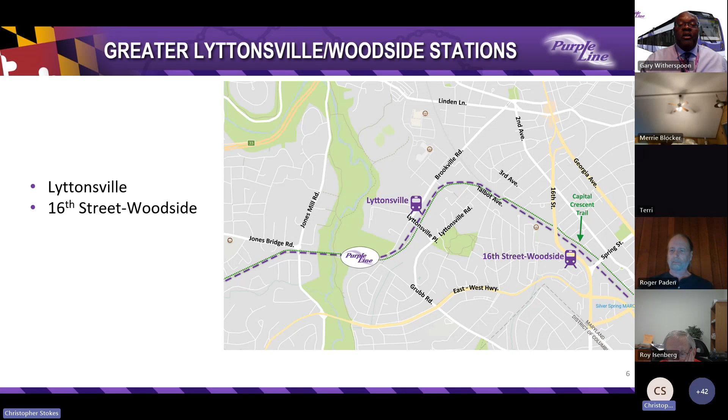Tonight, we'll cover the segment of the Purple Line that includes the following stations: Lyttonsville and 16th Street-Woodside. We are excited to share that we have created new renderings, one of which we're sharing for the first time during this meeting. Here's the 16th Street Woodside station, a side platform station that will be adjacent to 16th Street and the CSX Metro tracks near the Spring Street Bridge.

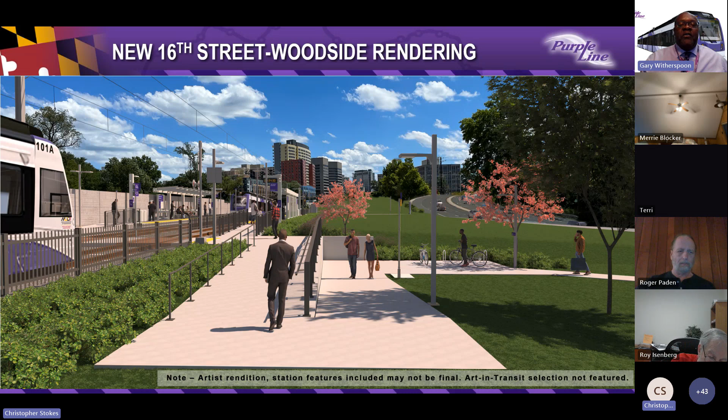The project will enhance safety around each station. We've created a series of renderings that will give the public a true depiction of how station areas will look, and all of the renderings can be found on the project website, purplelinemd.com. Now I'm going to turn the meeting over to Project Director Ray Biggs II.

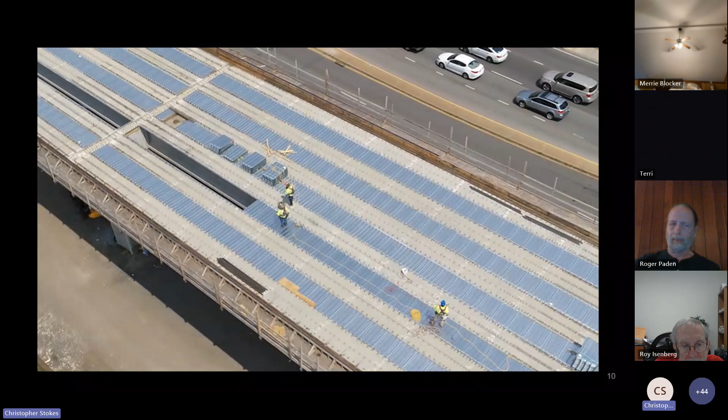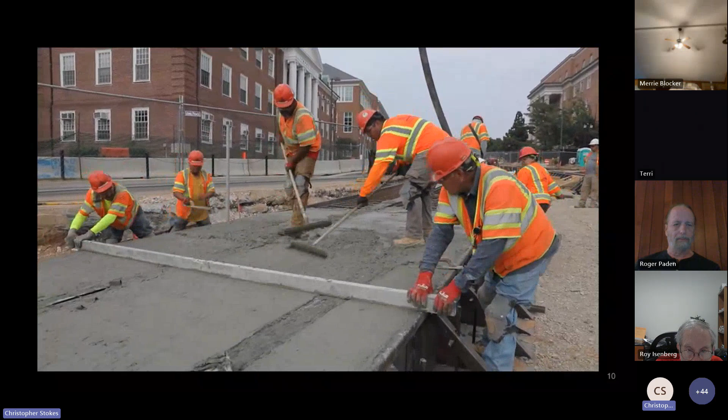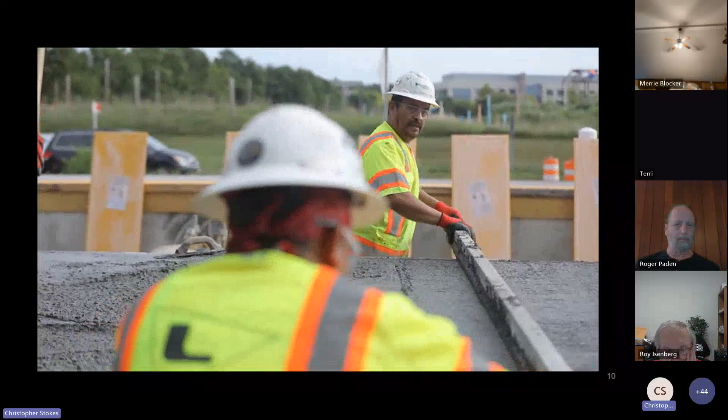I am sitting here at one of the many businesses that will benefit from the Purple Line, directly across the street from the new Riverdale Park North UMD station. This will be the first complete station. As we near the end of 2023, the nearly 1,000 workers building the Purple Line is making measurable progress along the alignment.

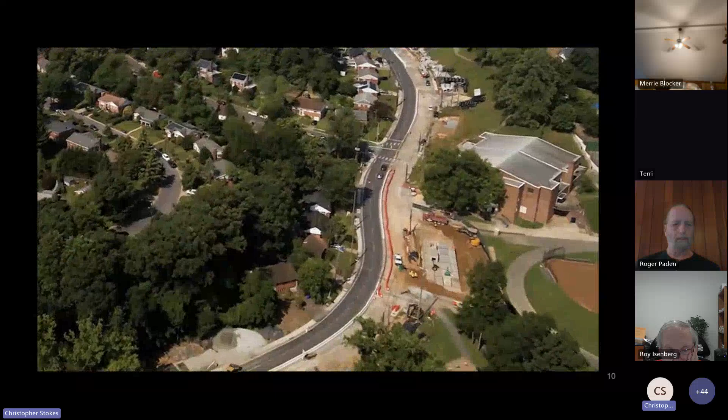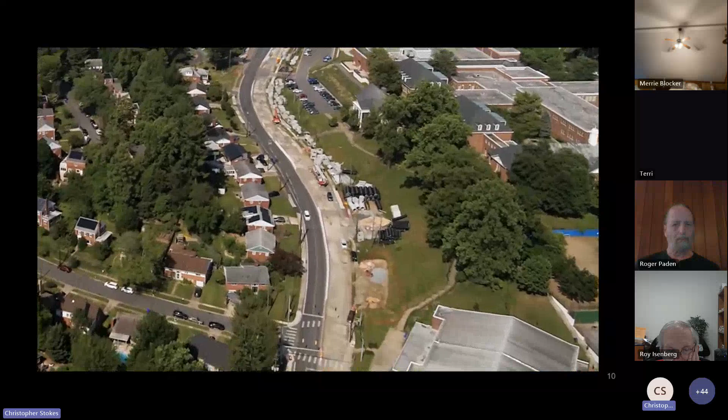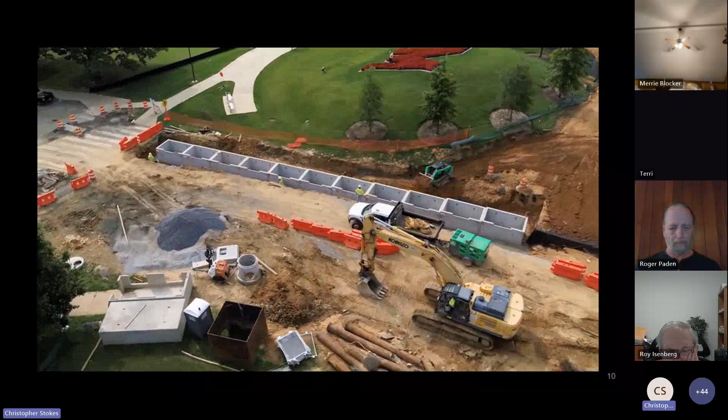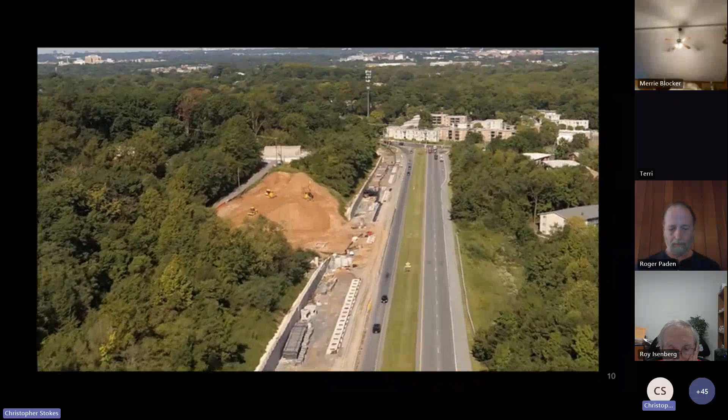Another significant improvement is the new stormwater management system. This includes miles of new pipes ranging from 12 inches to over 72 inches in diameter. More than 53% of this new pipework is now complete. Along with concrete pipes, our teams have installed over 20,000 square feet of underground sand filters, retention ponds, and planter boxes, all important parts of the new stormwater drainage system. These critical environmental upgrades may not be visible above ground, but must be completed before tracks are added.

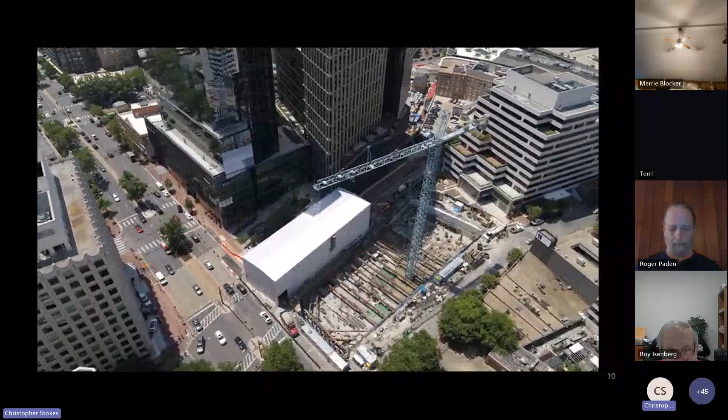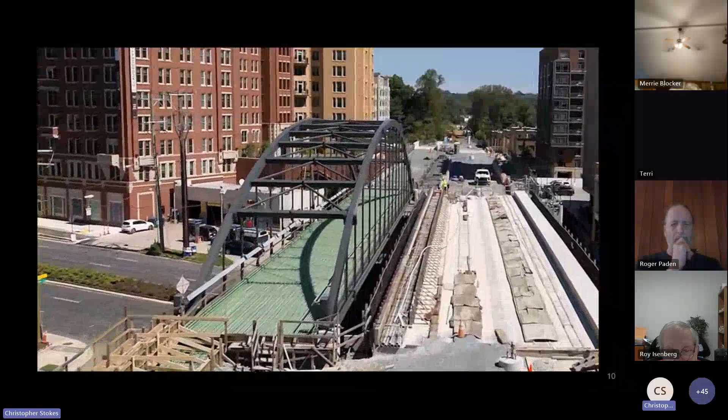In Bethesda, work connecting the elevator to Metro's Red Line has reached the bottom of the shaft, and teams have started excavating horizontally to create the cavern. The Elm Street pedestrian path across the alignment, as well as another half a dozen bridges and underpasses, will serve the new and improved Capital Crescent Trail.

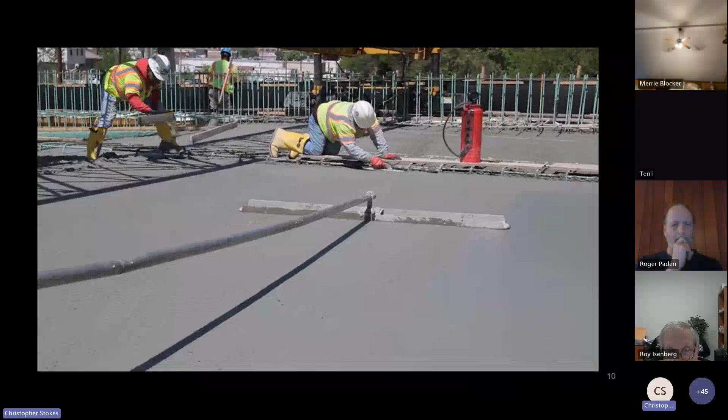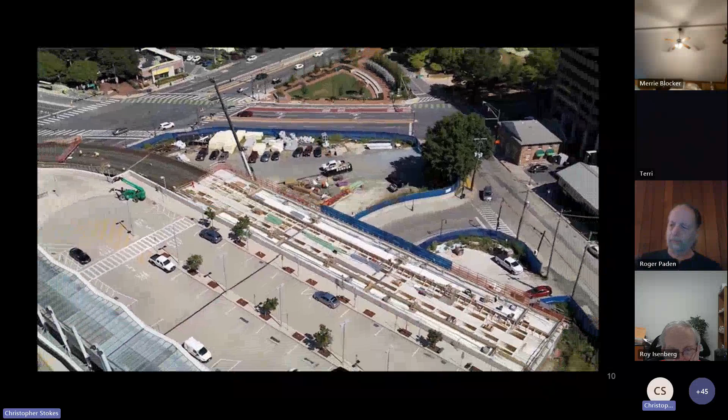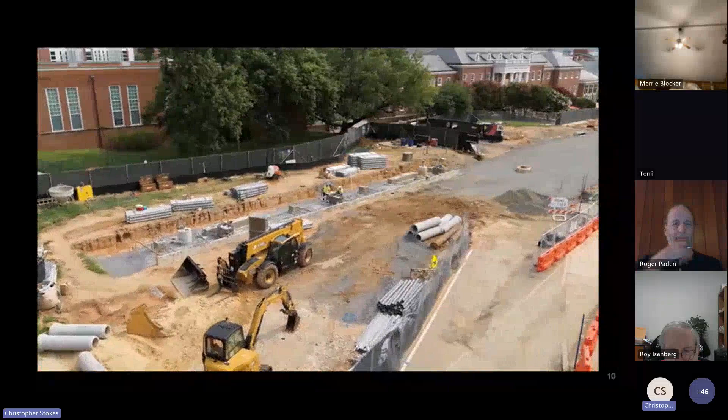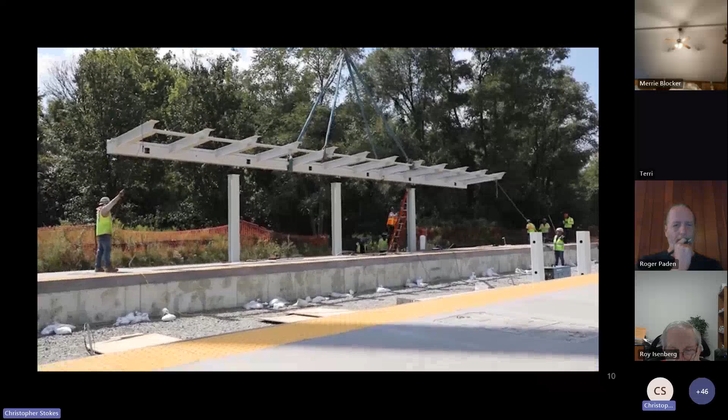Concrete placement of the historic Talbot Avenue Bridge occurred in early 2023, along with necessary road improvements, making it possible to open the road this year. Concrete for the elevated Silver Spring Station and the elevated Kenilworth Riverdale Station are complete, and crews are hard at work on the utilities and other advanced station elements. And speaking of stations, more than half of Purple Line stations are currently under construction, with structural canopies installed at Riverdale Park North UMD. Canopies provide an exciting glimpse of how Purple Line stations will look.

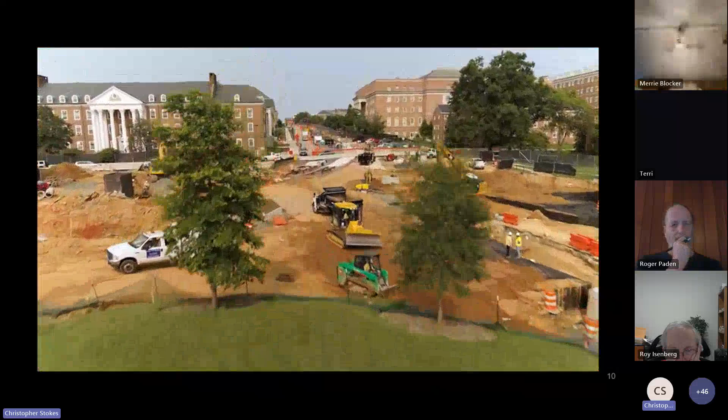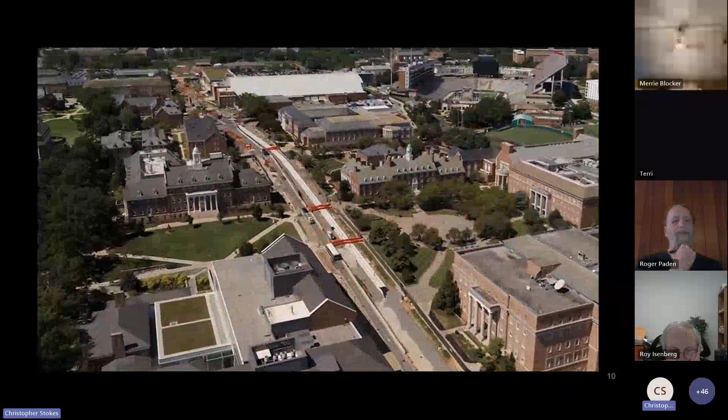During the summer break at the University of Maryland, crews accomplished a tremendous amount of work, completing drainage, roads, and tracks. Over 1,500 linear feet of track is now in place on campus as part of the 5 future stations servicing the University of Maryland.

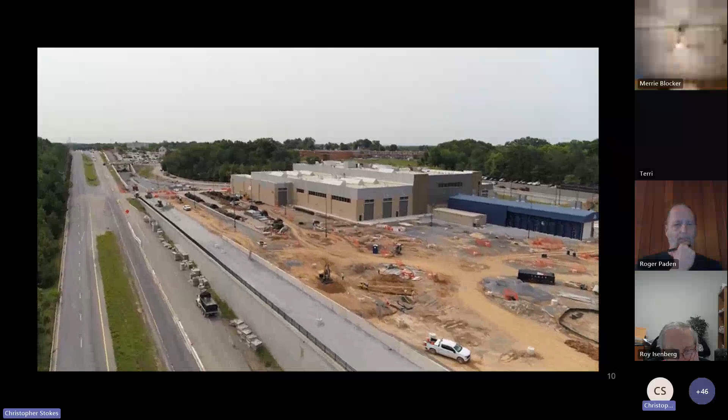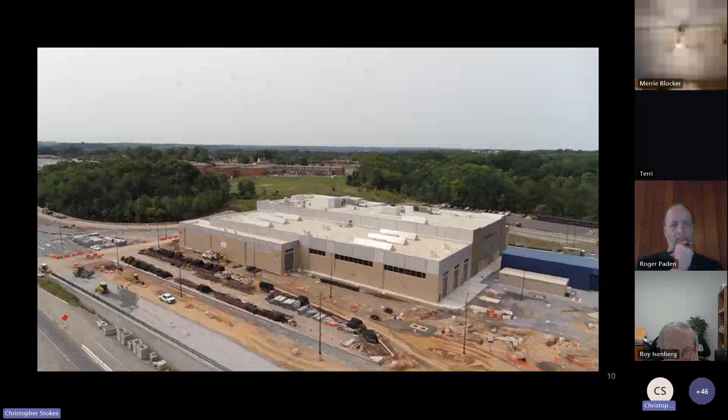Along Veterans Parkway, our Glenridge Operation and Maintenance Facility is fully operational, with yard utilities and specialty track installation underway. Purple Line light rail vehicles are scheduled for delivery here in early 2024.

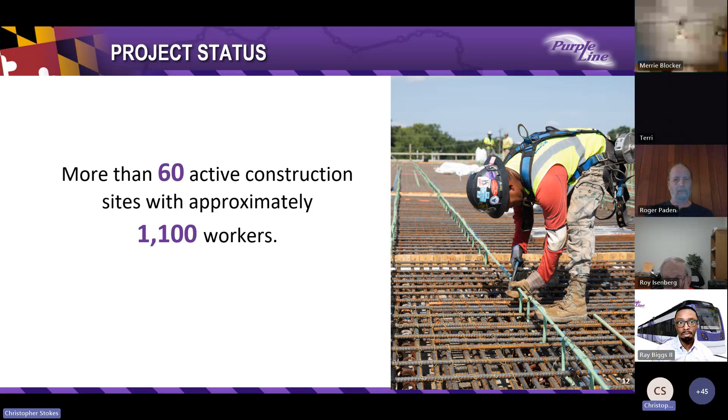We have been really busy over the last few months and this summer. We are more than 58% complete with construction across the alignment. You can see a lot of the work going on from the 60 active construction sites with approximately 1,100 workers working across the alignment, and with that construction, we've relocated about 98% of the underground utilities across the alignment.

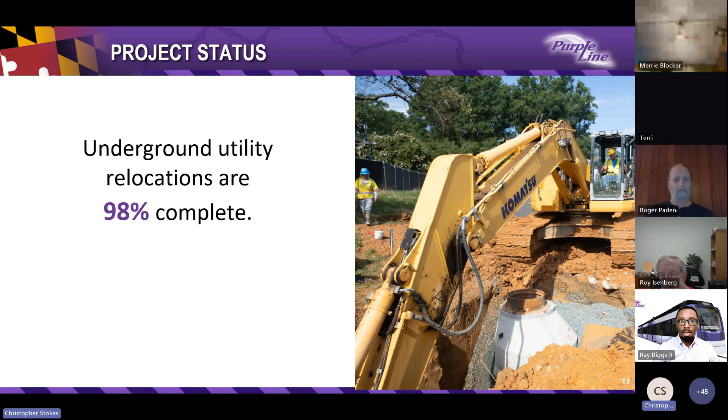In addition, we've installed more than half of the overhead catenary pole foundations along the alignment, which will help support the power for the Purple Line. And we've installed 3 out of 10 traction power substations, which will supply that power to run the Purple Line for us.

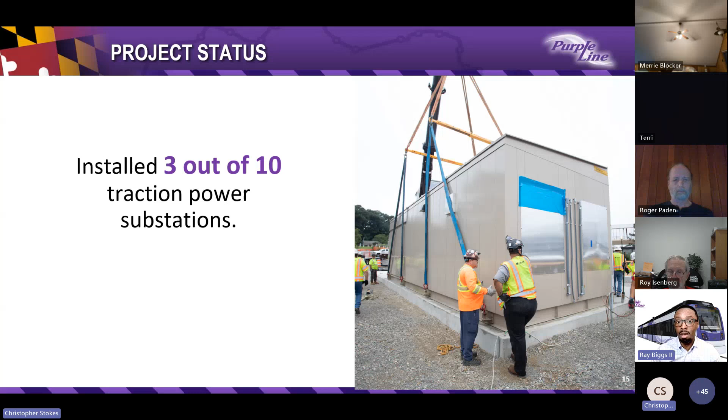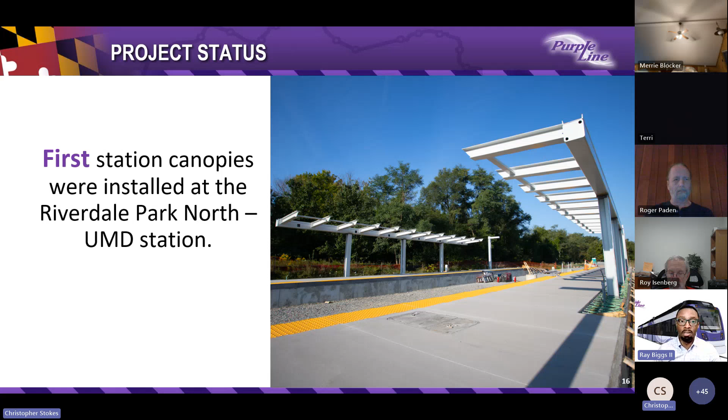Our first station canopy was installed at the Riverdale Park North UMD station, and we are working hard to install more across the alignment. Additionally, 26 of the 28 light rail vehicles are complete and ready for delivery.

Those are some very large vehicles - they are 142 feet in length. We actually got to see them in Elmira recently, which they are in New York right now.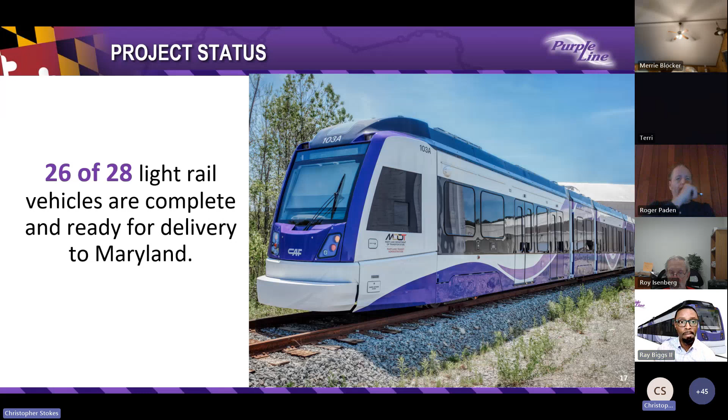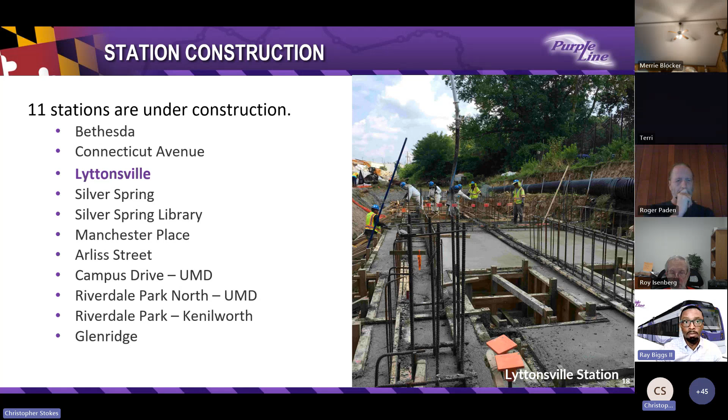More than half, to be exact, 11 of our 21 stations are under construction, and today we will focus on Lyttonsville. With that, I'll pass it over to our Chief Executive Officer for Purple Line Transit Partners, Doran Bosso.

Thanks, Ray. Let's take a high-level look at where the project is headed in the coming years. This summer, the project went before the Maryland Board of Public Works and gained approval to extend the contractual deadline for passenger service to spring 2027, as you can see in the chart. But let's walk through what's coming up next.

As Ray mentioned, our light rail vehicles are very close to being ready for delivery at the O&M facility sometime in the first half of 2024. With that, we'll work to complete the test track, which is a little bit over a mile-long segment of track we'll use to test those vehicles before we move towards system-wide testing along the whole alignment. The whole team is focused and getting ready to open in spring 2027.

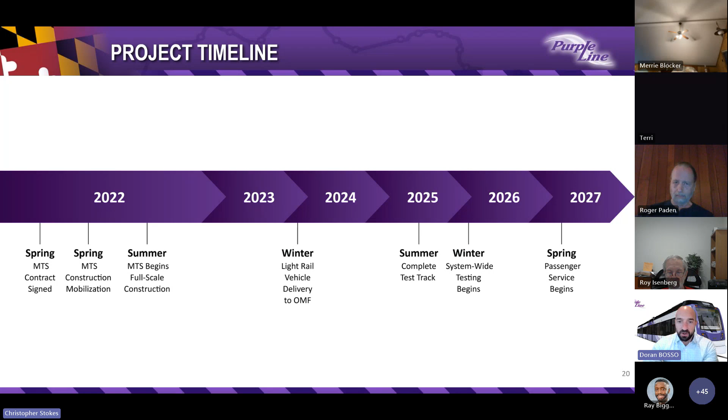So now I'll turn it over to Mike for more details on the upcoming construction in your community.

Yeah, hi, I'm Mike Edelen. I was on the meeting the last time around, so the segment lead there for segment 1, which this area from Rock Creek to Silver Spring is under my purview, and then also from Rock Creek back towards Bethesda.

We have accomplished quite a bit over the past 6 months or so. Most notably at Rock Creek, we poured the safety walks and removed overhang jacks. So if you walk the Rock Creek Park, the construction temporary supports are removed, and you can see the concrete facing of the bridge. We continue stream restoration efforts.

We began some of the finish work on the rail bridge, getting ready for safety railing and some of the concrete approach segments. And we began the Capital Crescent Trail underpass, which is just past Rock Creek going towards Silver Spring. There's an underpass that brings the trail from one side of the alignment to the other, so that excavation is complete, and we're moving forward with the concrete work there.

Upcoming will be obviously continuing with the stream restoration and completing that. The underpass work that I mentioned will be completed, and we'll install the Capital Crescent Trail steel bridge, the one that goes over the Rock Creek stream itself. That's upcoming in the early part of next year.

The storm drainage installation that connects our alignment down towards the Rock Creek stream - the final connections will be coming up - and the new Rock Creek Trail connection, which is between the Rock Creek Trail and the CCT. There's a serpentine ramp section that connects those two paths. Next slide.

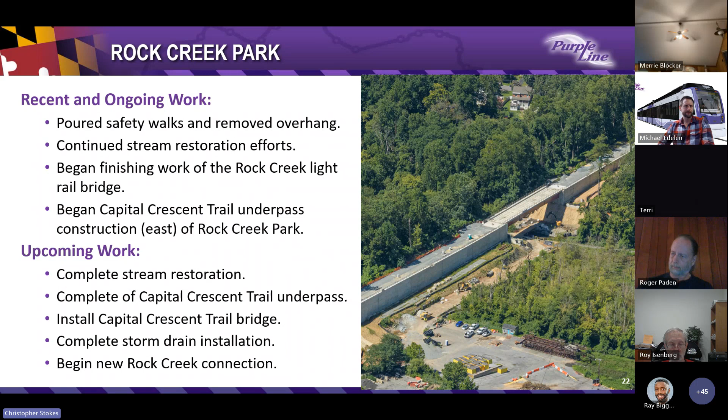Or am I in control? No. Hello? We're on the next slide, Mike. You okay, see it? I think it's my internet connection, sorry, it lagged there for a second.

The Lyttonsville station area up by the yard, we've continued storm drainage installation there, installed a number of the overhead catenary pole foundations. Station construction commenced, and we began quite a bit of wall construction. At this point we're well on our way to completing the retaining walls in this area, probably 80-90% completed.

Upcoming, we'll be completing the wall construction, continuing the station construction and the connection to the Lyttonsville Bridge, and beginning the stormwater management facility, the several ponds and retention systems in this vicinity. There's quite a few, as this area feeds Rock Creek, quite a few underground systems there.

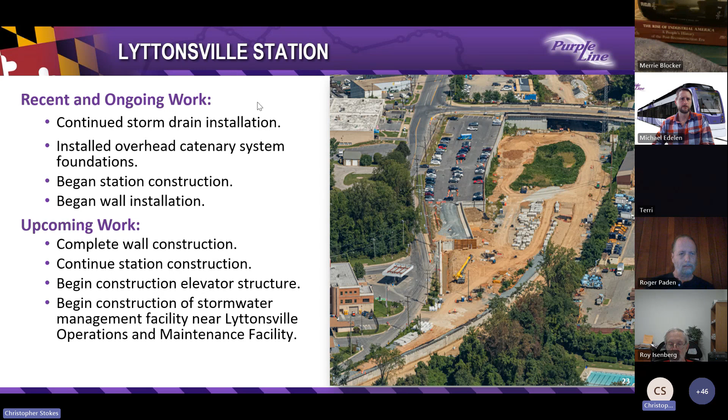Up at Talbot Avenue, the road itself, we completed the wall along Talbot Avenue. The residents will see that's been erected and backfilled now. We continued storm drainage installation along the road and up the approach area, connecting back towards the sediment trap behind the buildings.

We began roadway construction of Talbot Avenue between Michigan and Lanier, and if you were out there now you'd see we removed our temporary traffic barriers and installed some road base there. We also began sidewalk construction.

Upcoming, we'll be completing the sidewalk and curbway for the residents, and also the sidewalk on the trail connection, and paving and opening Talbot Avenue Road there, the resurfacing between Lanier and Michigan.

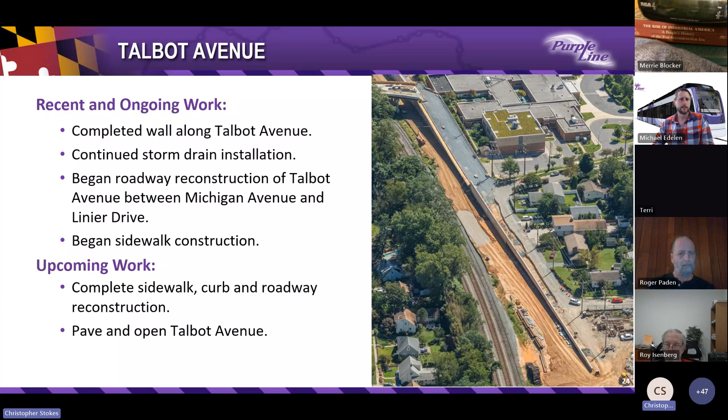Up at Talbot Avenue Bridge, just past that area, we constructed the ramps behind the Rosemary Hills School, placed concrete bridge deck, and began parapet wall and sidewalk construction on the bridge. The parapet walls on both sides are now complete, and we're moving into the sidewalk.

Upcoming, we'll be completing the ramp and completing the parapets in this area, that's the concrete architectural facing and traffic barrier on both sides of the road, and opening the bridge for public use.

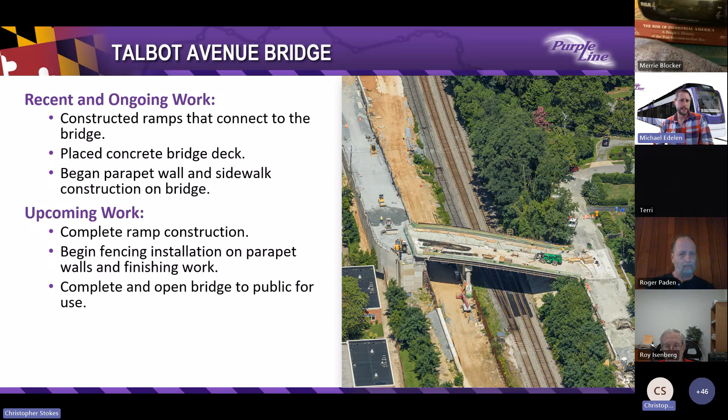Behind Rosemary Hills School, between that and the project, in advance of students returning to class, we installed new sidewalk along the approach segment of Talbot Avenue Bridge. We restored parking spaces and installed a new stair connection to the road. We'll continue maintaining construction fencing between the work zone and school property.

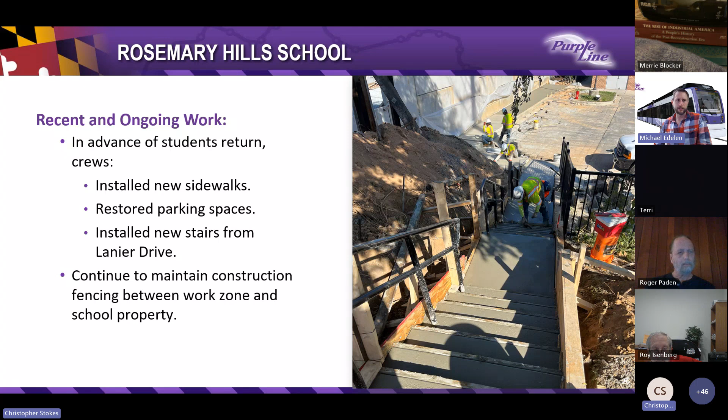Woodside Station, up at Spring Street Bridge, we relocated sewer and water connections. We completed 3 of the 4 jack and bore operations. The remaining pipe under CSX is a stormwater pipe, which is upcoming. We also restored Ballard Avenue, on the opposite side of the CSX and Metro tracks from the alignment.

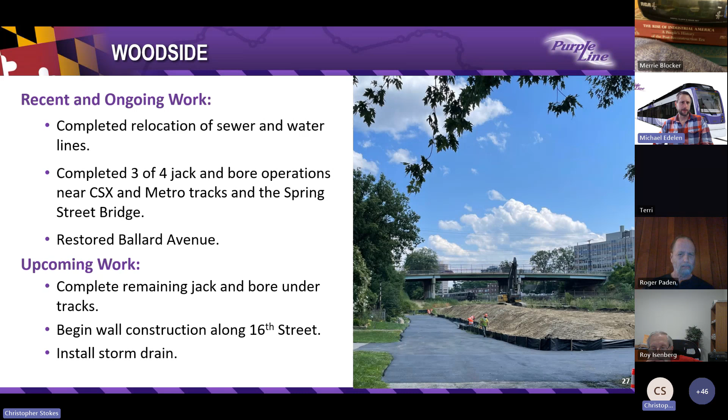Maintenance of traffic: some of the various areas we're working in the street have traffic patterns that will change as the work progresses. Talbot Avenue is mostly moving on to all lanes being open, though it's not yet open to through traffic, but will be upcoming. Work may occur on both sides of the road and across roadways.

We have some areas where we're still making minor utility connections, not relocations, but connections for station water and electric and things like that, and there will be lane closures associated with some of that work. You'll see orange cones and barrels for this type of operation, flaggers directing traffic on either side of the work areas, for underground utility work which may require road plates overnight between shifts if the work isn't backfilled completely by the end of the shift.

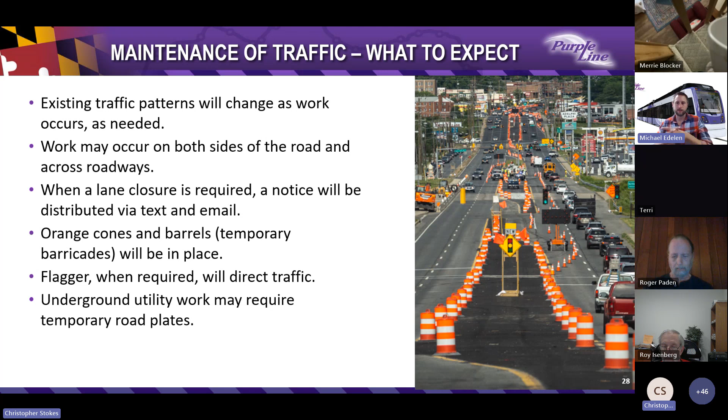I think that's the last slide. Yeah, next will be Carla.